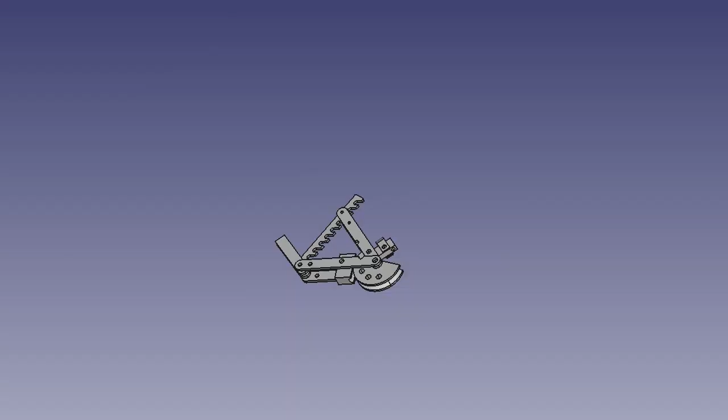We need to make a couple of devices for our next projects. The first is the tube bender. We have reviewed many options and decided to make this one. Let's get started.

First we cut the necessary parts out of a 10mm strip, these ones.

Then we'll make this detail. Found some 20mm scrap.

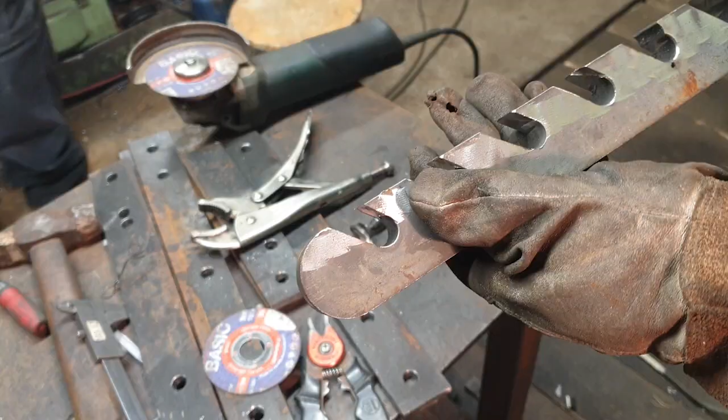This was the part that caused the most problems. Firstly, we could not find a bar suitable by thickness, and secondly, we did not have enough working experience with a lathe to make an internal radius. But we did it.

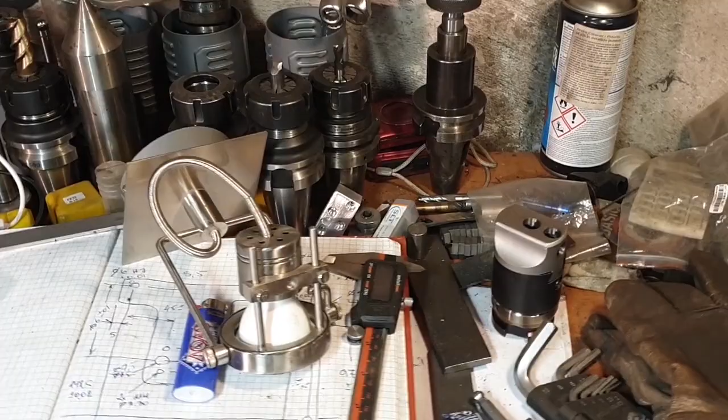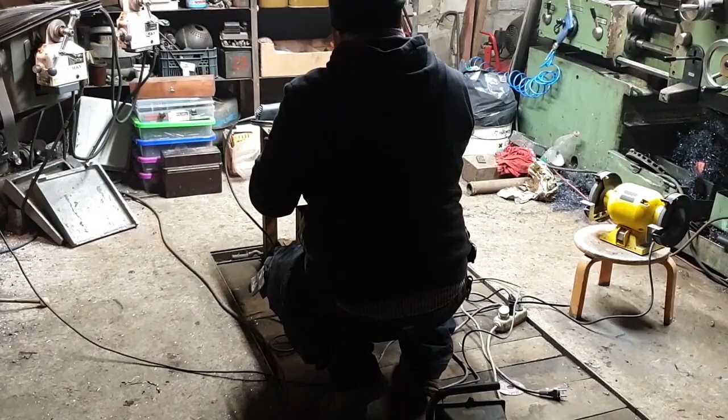Unfortunately, there is no video of the production of this part, but we made it out of 4 10mm plates, pushing external parts with already sharpened inner edges in the form of a pipe, and welded it all together.

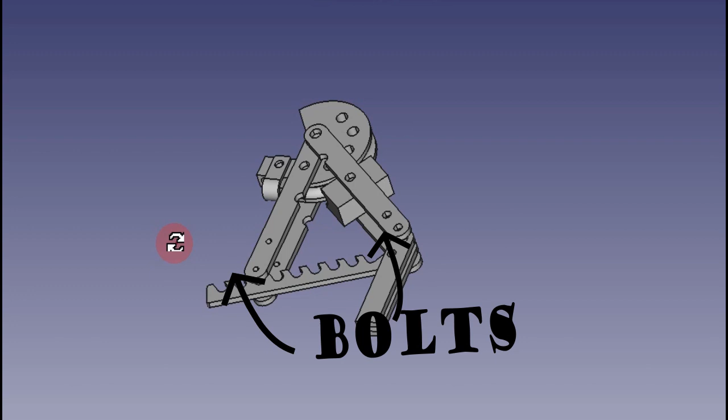This is where we put the bolts, and here, here and here you need to grind stud bolts for quick disconnection.

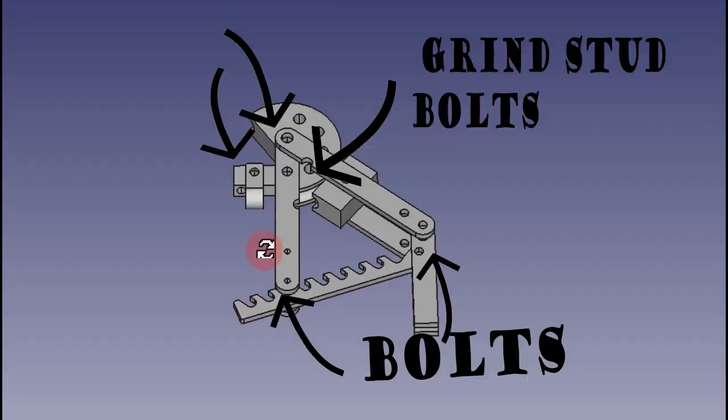We assembled the entire device and were happy that everything was working. We created a good device, and most importantly, a working one.